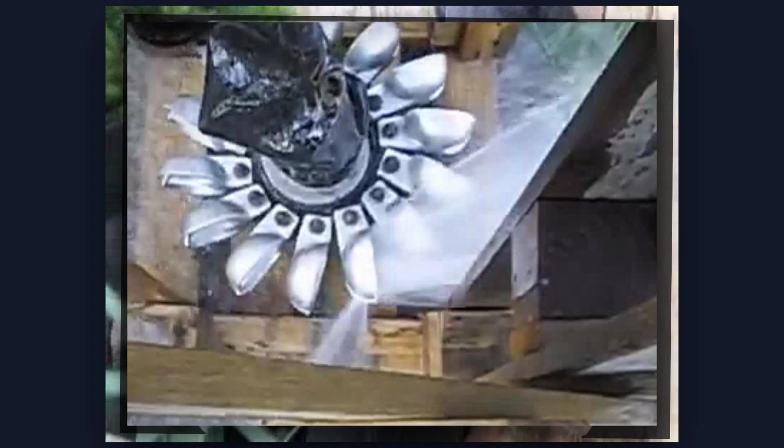The modern consumer is permanently tethered to a vulnerable, expensive utility grid, paying hundreds of dollars every month for basic survival. Meanwhile, traditional off-grid communities have quietly utilized localized aquatic physics for centuries to generate massive amounts of continuous mechanical and electrical power for free. No dams, no solar panels, no monthly bill.

This practice is called aquatic harvesting, and the physics behind it are so simple, the real question becomes why almost nobody is doing it. Every month, the average American household faces a rising power bill, now averaging over $150, with some regions seeing annual increases that far outpace inflation.

Over the last decade, residential electricity prices in the United States jumped from 13.4 cents to 15.3 cents per kilowatt hour, a 14% increase, while the cost of living crept up at less than half that rate. The numbers are blunt: utility rates climb, but reliability falls. In 2024, the average home endured 106 minutes without power, up from 92 minutes just 10 years before.

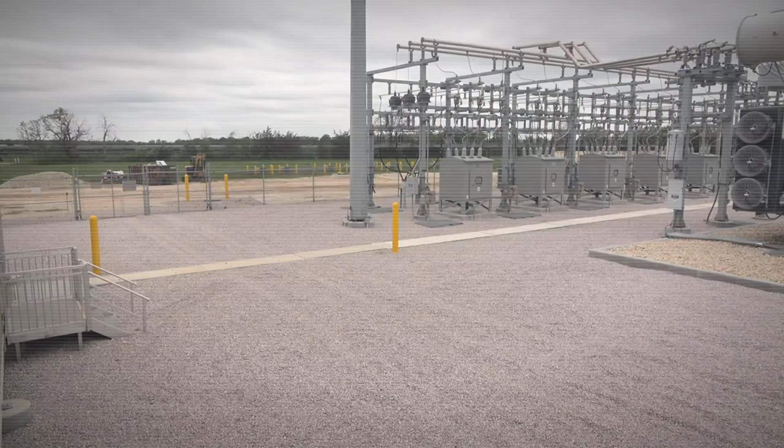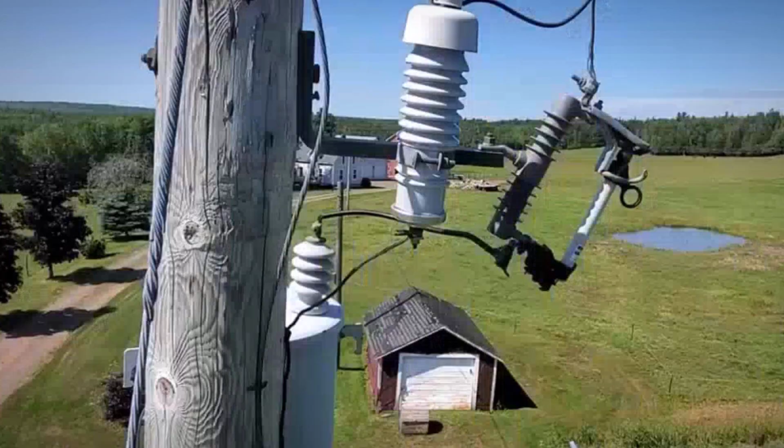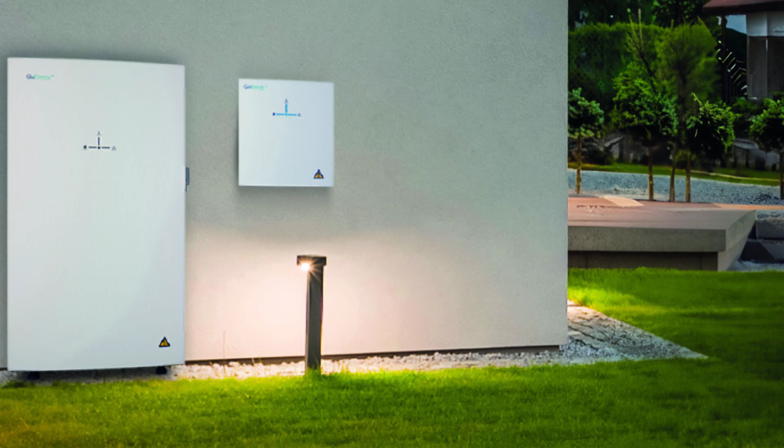Grid failures are no longer isolated to hurricanes or wildfires. Routine outages stretch across suburbs and small towns alike, driven by aging transmission lines, deferred maintenance, and overloaded transformers. Solar panels, once the favored escape from utility dependence, offer only a partial reprieve. Cloud cover, short winter days, and the ever-present risk of inverter or battery failure mean most solar homes remain tethered to the grid or invest thousands in lithium storage.

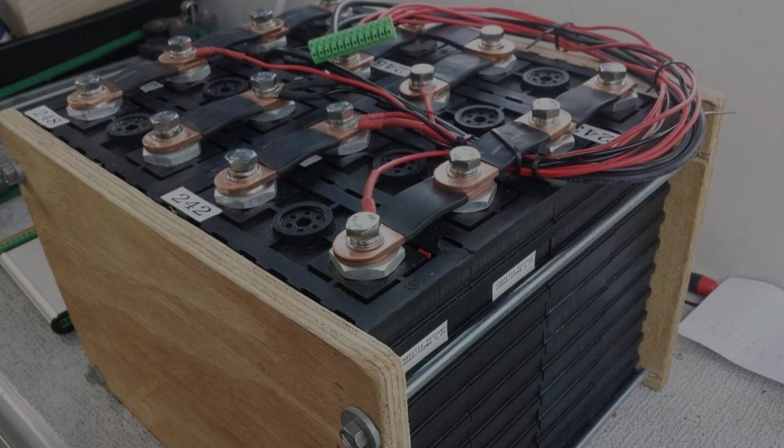A typical off-grid solar setup, sized to cover a family's nightly load, demands a battery bank costing $1,500 to $3,000 upfront plus replacement every 8 to 12 years. The promise of energy independence evaporates under the weight of replacement cycles, warranty claims, and the reality that even the best solar system sits idle half the day.

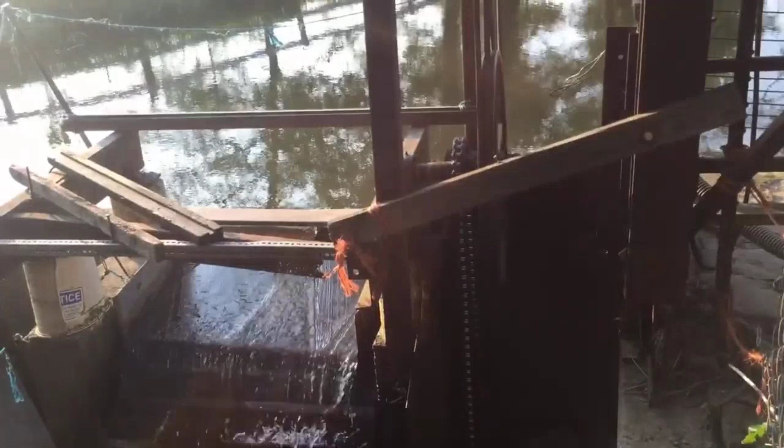Meanwhile, outage frequency and duration continue their upward climb, as documented by the IEEE reliability indices. The illusion of a dependable, affordable grid is unraveling. For those unwilling to accept rolling blackouts, ballooning bills, and the hidden costs of solar, the search for a continuous, self-sustaining power source is no longer theoretical. It is a matter of survival and economic sense.

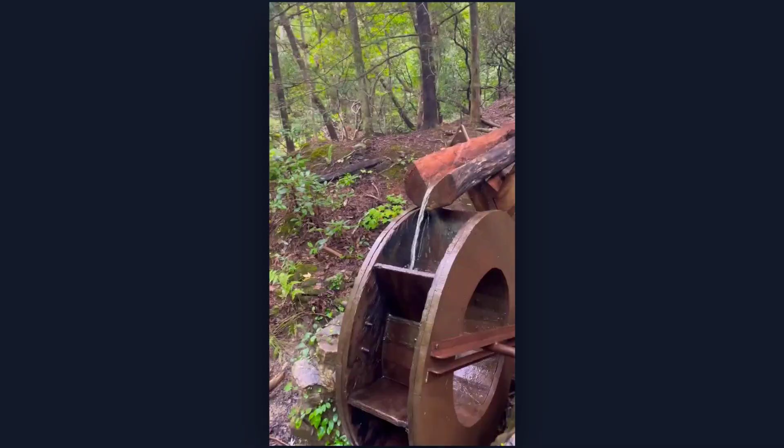Hydroelectricity in the public imagination is synonymous with concrete walls, flooded valleys, and turbines the size of trucks. The reality is far simpler and far smaller. For centuries, rural communities powered entire economies with nothing but a modest stream and a wooden wheel. 19th century grist mills scattered across North America and Europe ran day and night on vertical drops of just a few feet. No dam, no reservoir, no government contract, just moving water and gravity doing the work.

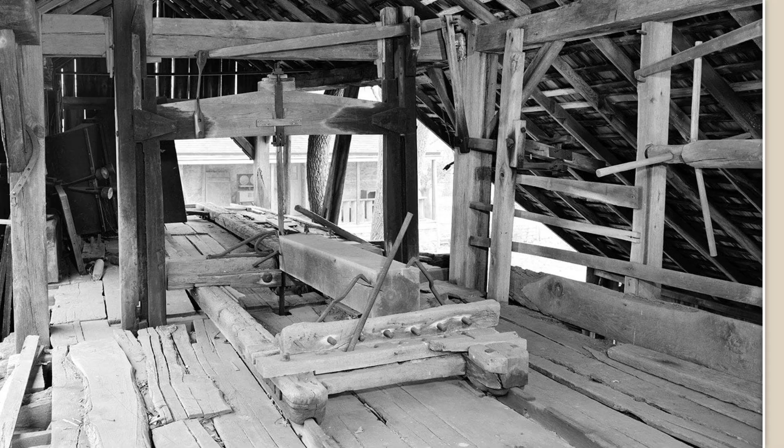These mills operated reliably through drought and storm, grinding grain, sawing timber, and pumping water with nothing more than a steady flow in a well-placed channel. The misconception that hydroelectricity demands a massive river or a dam the size of a city block is a modern invention shaped by the marketing of industrial utilities. In practice, the physics of water power scale down without losing effectiveness.

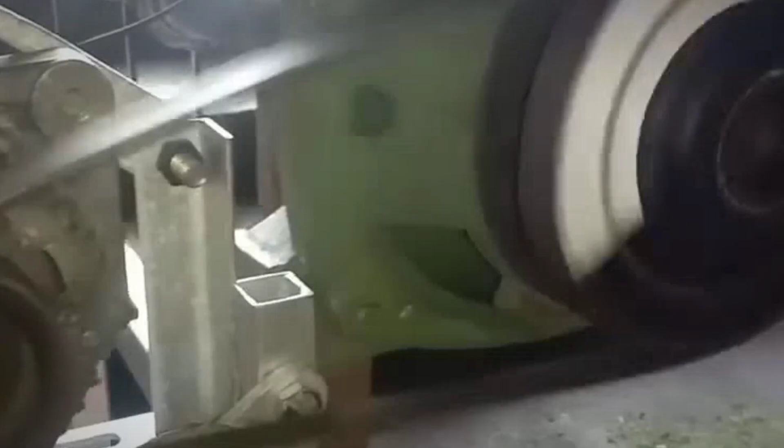A net head of 2 to 5 meters, less than the height of a single-story house, can drive a small turbine or turn a belt with enough force to supply all the lighting, refrigeration, and basic appliances for a rural home. The millwrights of the past understood this intuitively. It is not the volume of water that matters most, but the speed and vertical drop. Even a shallow creek, if channeled correctly, delivers continuous, predictable energy.

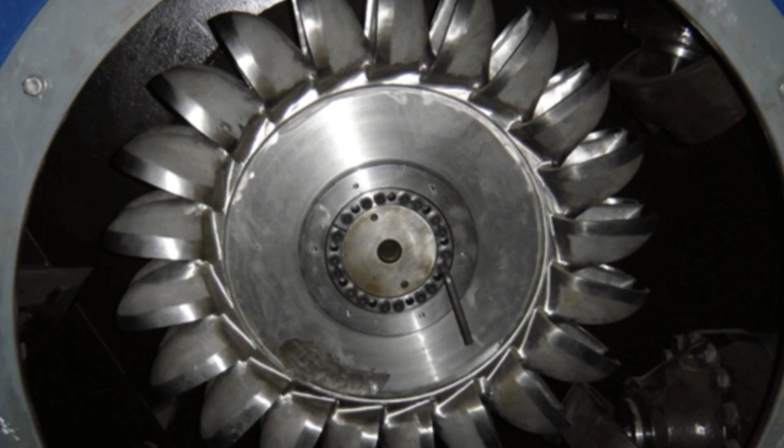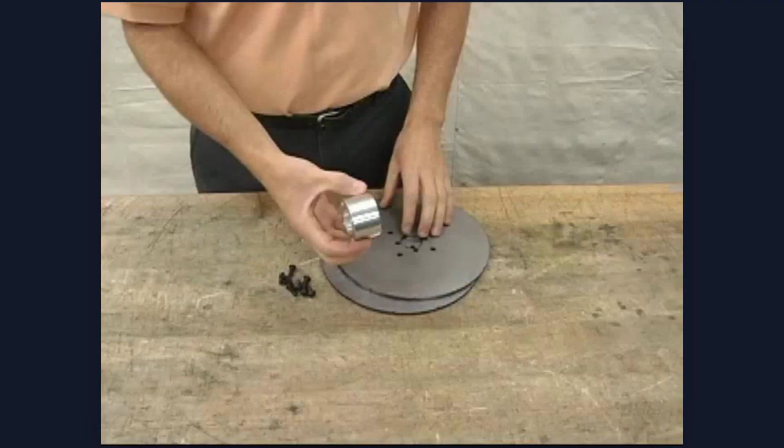Today's micro-hydro systems borrow directly from this legacy. Instead of wooden wheels, they use Pelton runners or Turgo turbines built to spin at hundreds of revolutions per minute on modest flows. Permanent magnet alternators convert that rotational force into electricity with no need for batteries or fossil fuels. The entire system can be assembled for less than the cost of a single month of grid power in some regions. The myth of the mega dam is a barrier, and it collapses under the weight of historical precedent and the undeniable power of moving water.

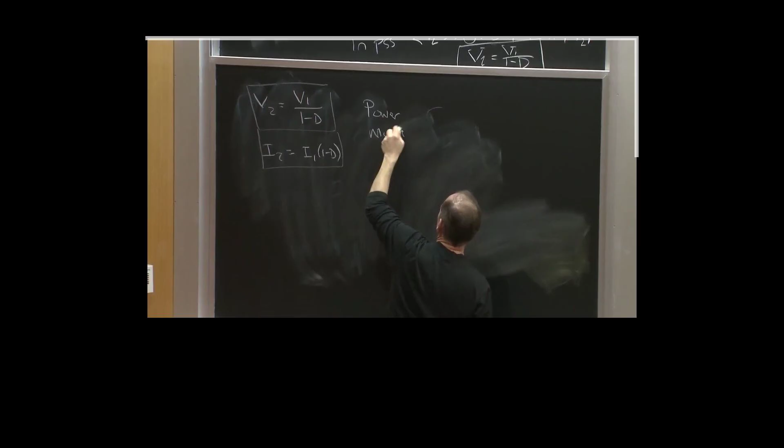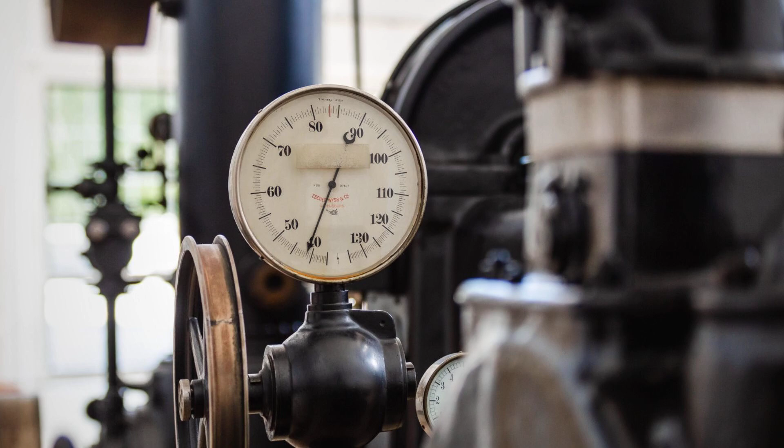Water falling under gravity carries an enormous potential. The core equation, P = ρgQH × η, translates this raw physics into real-world power output. Here, P is power in watts, ρ (rho) is the density of water, g is gravitational acceleration, Q is volumetric flow in cubic meters per second, H is net head in meters, and η (eta) is the total system efficiency, typically between 55 and 70% for modern micro-hydro.

Net head is not just the vertical drop from intake to turbine, it is the gross elevation minus all friction and turbulence losses in the pipe and nozzle.

Every meter of head counts. Consider a 100-foot vertical drop, 30.48 meters, delivering a modest flow of 1 liter per second. The theoretical output is 1,000 times 9.8, times 0.001, times 30.48, or roughly 299 watts. At 60% efficiency, that is 180 watts of continuous real electricity, enough to run lighting, refrigeration, and basic electronics

around the clock. Push the flow to 11.2 liters per second, and the same drop yields 3,350 theoretical watts. With typical losses, the net output lands near 2 kilowatts, rivaling the daytime surge of a full solar rooftop, but available 24 hours a day. The relationship is linear: double the head, double the power. Halve the flow, halve the output.

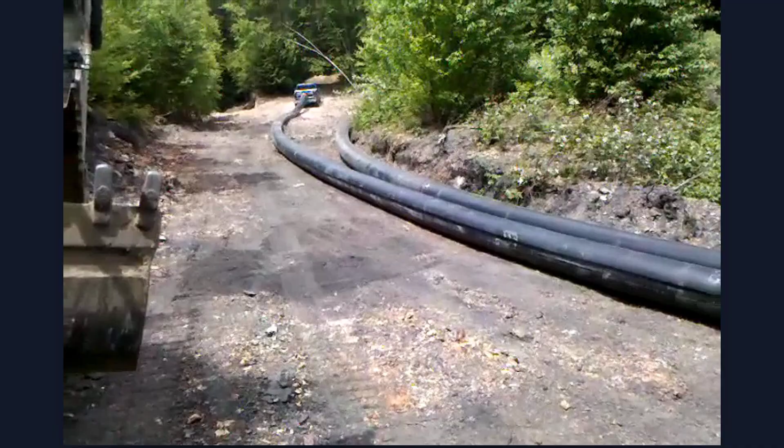This is why even a shallow creek, if it can be routed down a steep hillside, becomes a reliable source of energy. The design process begins and ends with these numbers: hardware sizing, pipe diameter, turbine selection, all follow from the available head and flow. A properly calculated net head is the master variable, dictating every downstream engineering choice. The theory is not abstract, it is the foundation for every successful microhydro system.

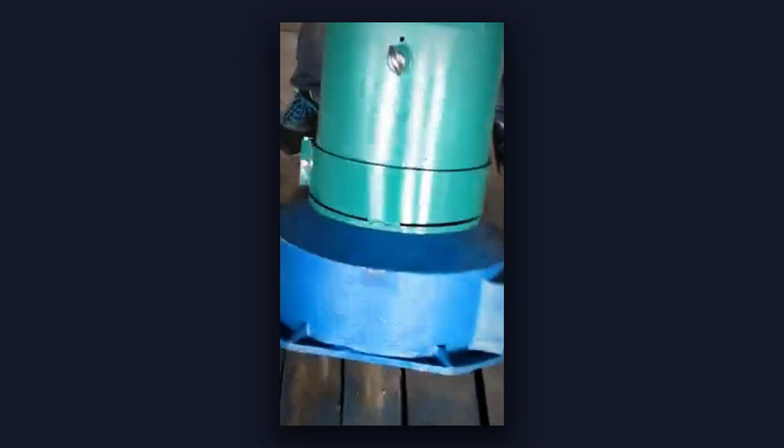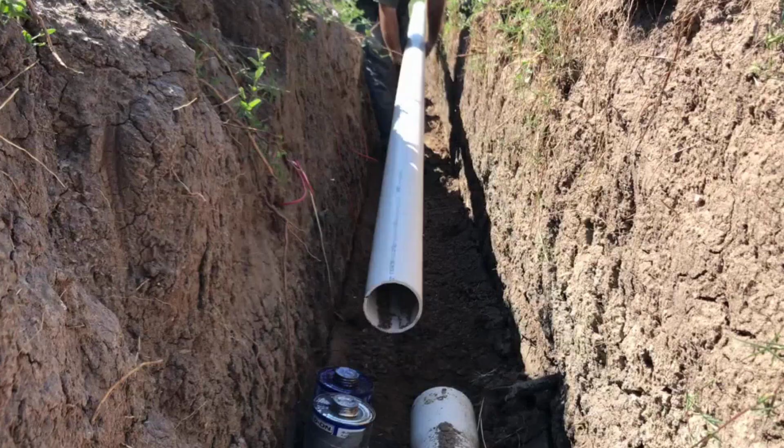From Amish workshops to modern off-grid homesteads, a 1 kilowatt microhydro system begins with the penstock, a length of pressure-rated PVC pipe, typically 4 inches in diameter, running from the intake to the turbine. For a 30-meter run at 0.1 cubic meters per second, Schedule 40 PVC holds a pressure rating well above the 4-bar maximum encountered even at 40 meters of head. Cost for this section, including solvent welded joints and intake screen, averages $120.

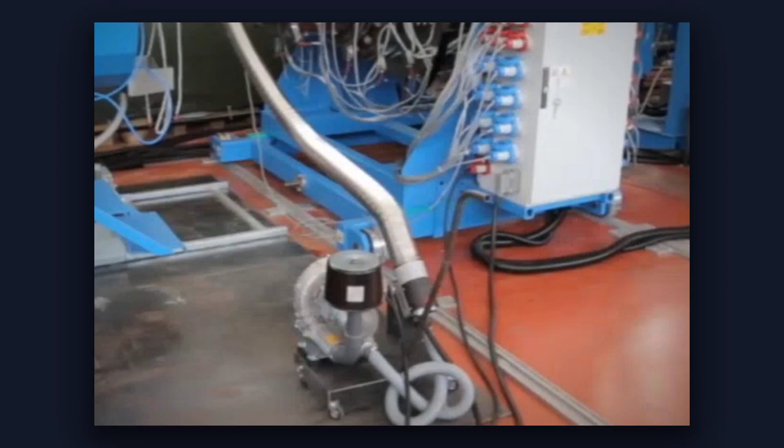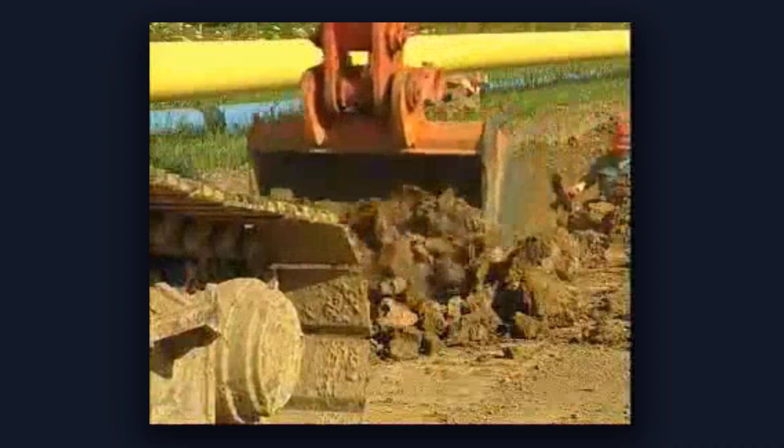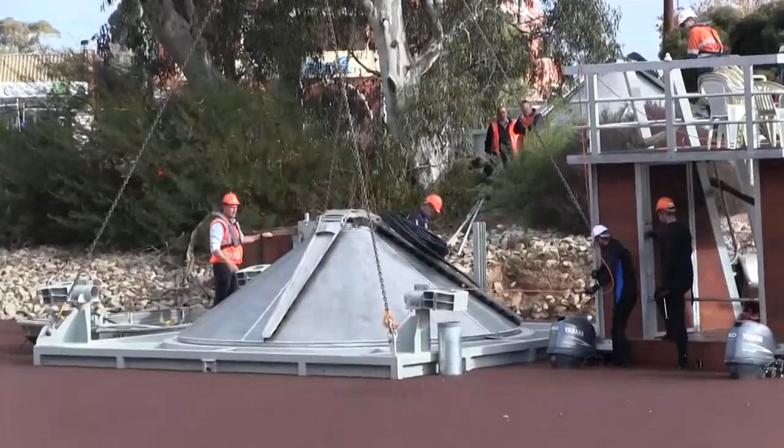PVC is preferred for its low friction coefficient and resistance to corrosion, and steel is reserved for high pressure or buried installations where pipe friction and UV degradation become secondary to mechanical strength. The intake must filter debris without choking flow. A fish-friendly mesh, 6 millimeters or finer, bolts across a concrete-filled intake box.

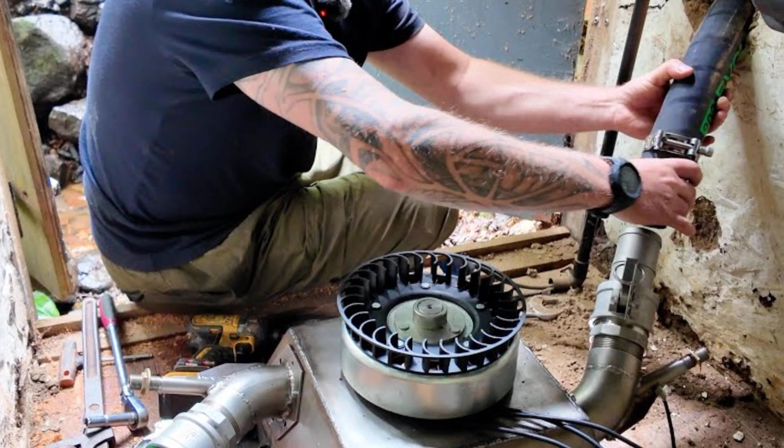Stainless steel nozzles with adjustable throats cost $80 each and focus the water jet, maximizing impulse on the turbine buckets. The nozzle diameter is calculated to match available flow and head, ensuring the jet velocity approaches 20 meters per second at 15 meters of drop. This kinetic energy is delivered directly to the Pelton runner.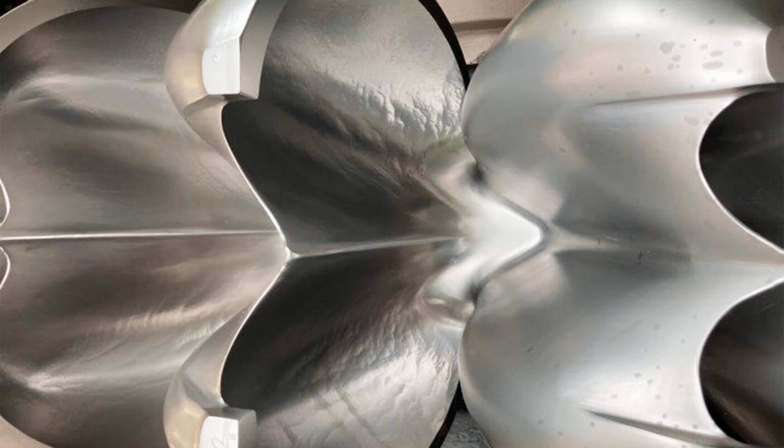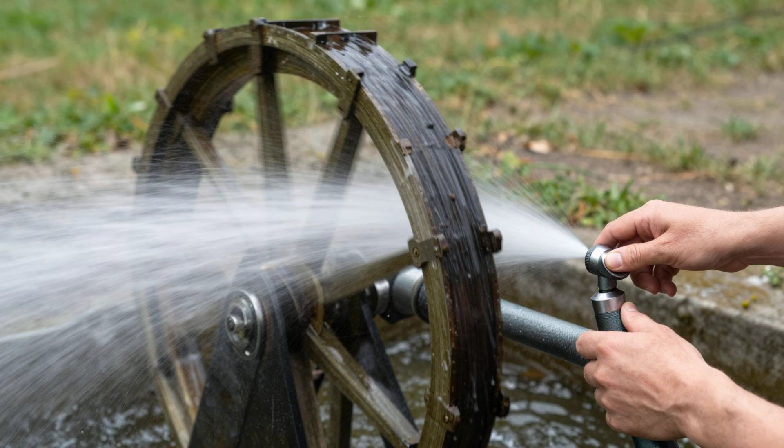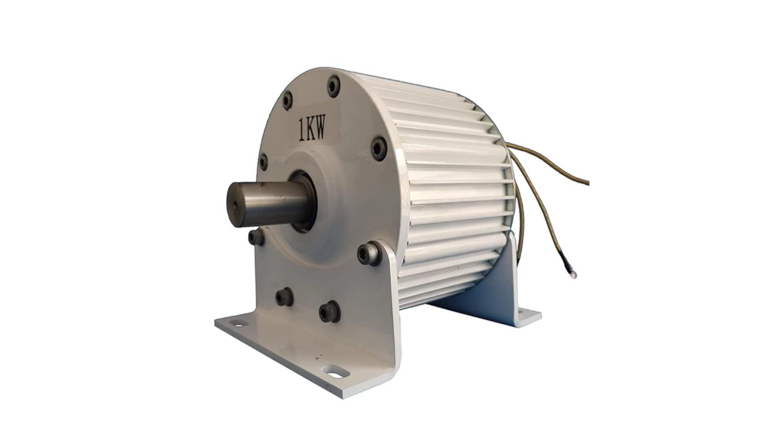The Pelton wheel itself, a 400 millimeter cast aluminum or composite runner, $250 retail, part number PEL 401K, features precisely shaped buckets to split and reverse the water jet. Under a 15-meter head and 0.12 cubic meters per second, the runner spins at 550 revolutions per minute, producing 260 Newton meters of torque. For lower head sites, a Turgo runner offers higher revolutions per minute at reduced torque with a modest efficiency penalty, but direct drive compatibility for smaller alternators.

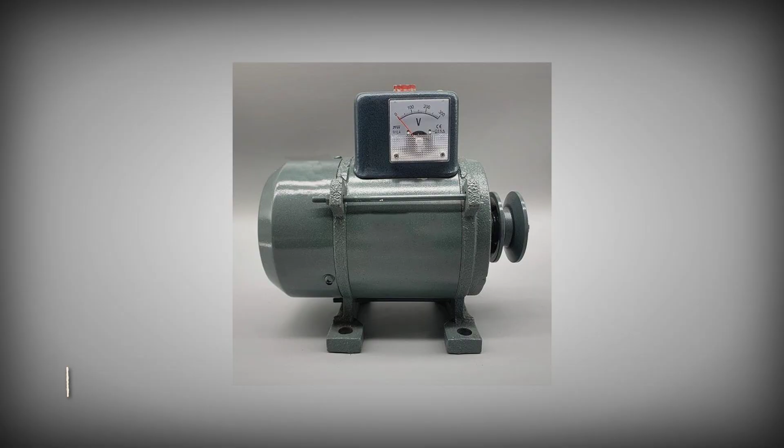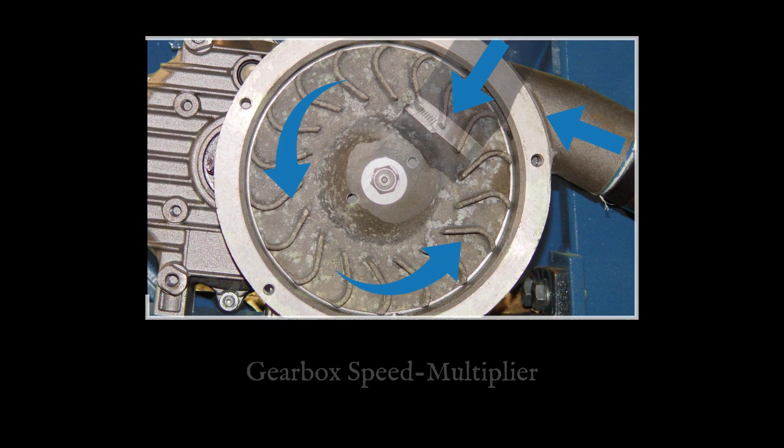Mechanical power transfers from the runner via a keyed shaft to a permanent magnet alternator. The MGL 3500, a 3 kilowatt 48 volt direct current unit, is the workhorse of off-grid hydro. Retailing at $300, it operates at 92% efficiency at rated speed, dropping to 85% under partial load. Direct drive is possible for high-speed turbines, otherwise a single-stage helical gearbox, $150, steps up runner revolutions per minute to match the generator's optimal range with less than 3% loss.

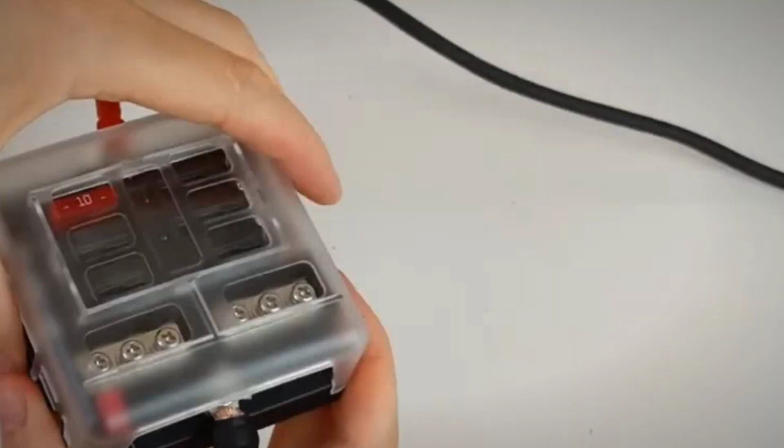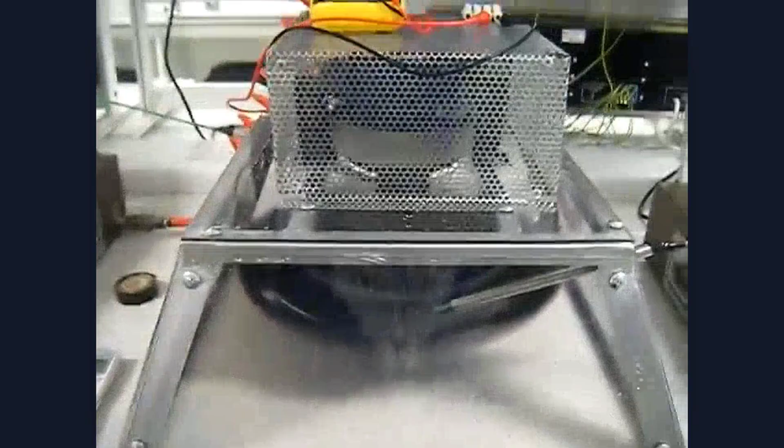Power exits the alternator as three-phase alternating current or rectified direct current, depending on load requirements. For battery-based setups, an MPPT charge controller, such as the TriStar TS45, $100, stabilizes voltage and maximizes output. Wiring, fuses, and mounting hardware add another $80 to $120, bringing the total bill of materials for a 1 kilowatt system to just under $1,000. Lower cost builds substitute a Turgo runner and smaller alternator, dropping the price to $620 at the expense of a 5% efficiency loss.

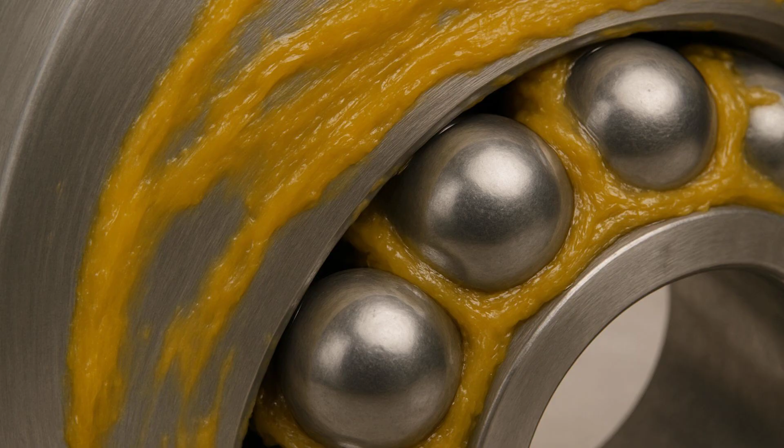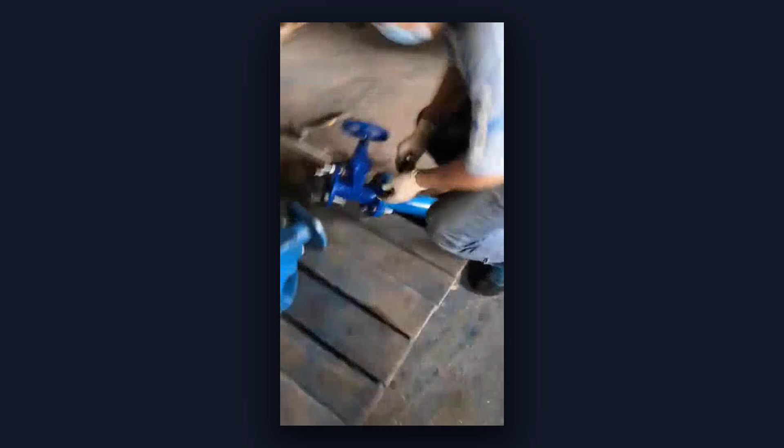Every component, from PVC penstock to Pelton wheel, is off-the-shelf, open source, or easily fabricated by a local machinist. Receipts and parts lists from actual builds document the true cost, $500 to $1,000 for continuous 24-hour power, assembled in a weekend with basic tools and no specialized labor. This is not theoretical engineering, it is a blueprint for energy independence, grounded in physics and delivered by water moving under gravity.

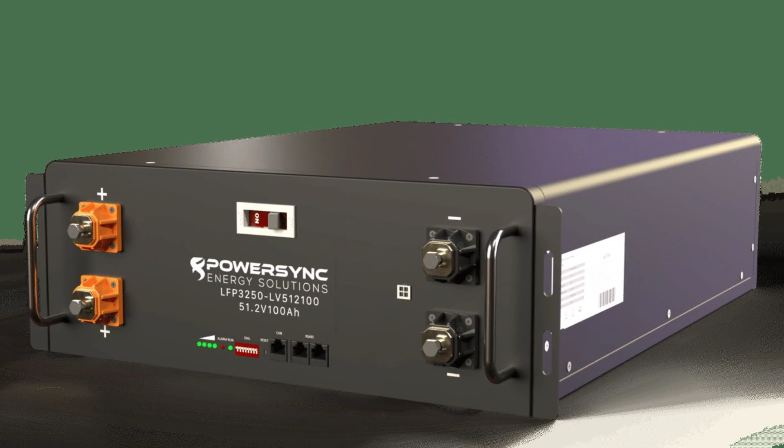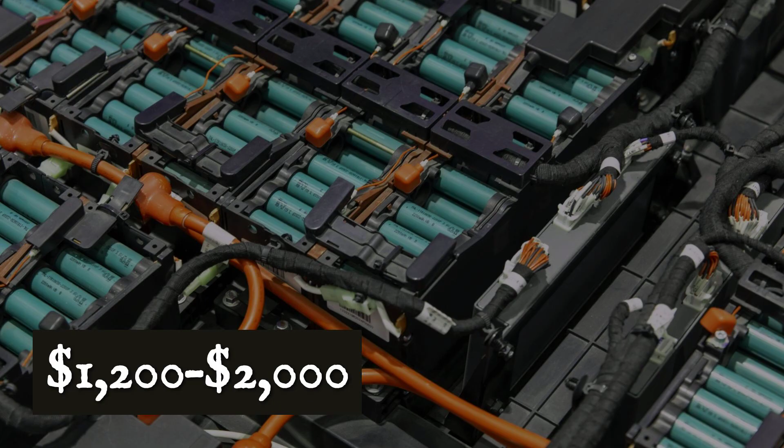A lithium battery bank sized for true off-grid living is not a luxury, it is a necessity forced by the intermittent nature of solar. Industry-standard lithium iron phosphate modules, including the battery management system and enclosure, cost between $120 and $200 per kilowatt hour. For a typical 10 kilowatt hour battery pack, the upfront price lands between $1,200 and $2,000. Stretch that to 20 kilowatt hours, and the outlay doubles.

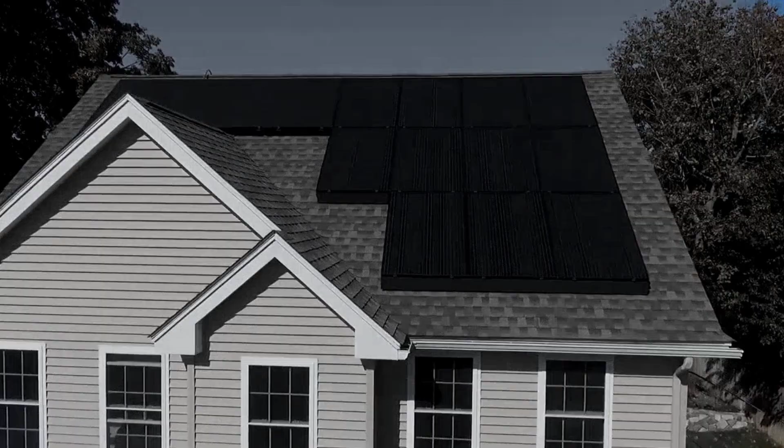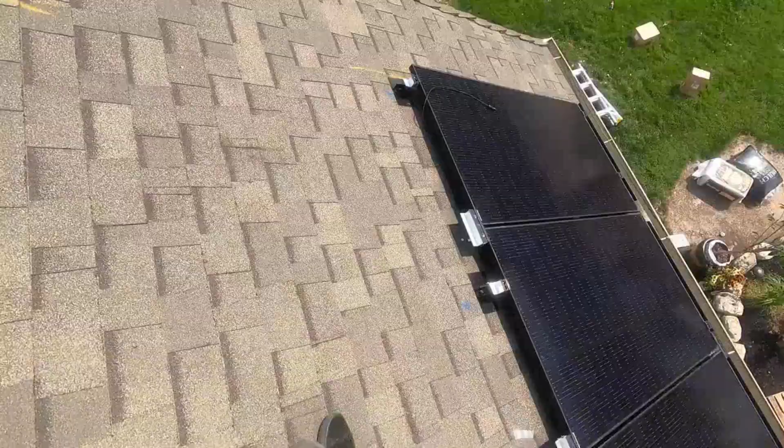This is before the cost of the solar array, the inverter, the charge controller, or the wiring hardware that pushes a fully independent solar setup well past $5,000, even with careful sourcing and do-it-yourself installation. The true cost is not just in the purchase. The median warranty is 8 to 12 years, and field data from homesteader forums confirm that most banks are swapped by year 10. Over a 20-year window, the battery line item alone can reach $3,000 to $6,000, not counting disposal fees or the environmental cost of spent cells.

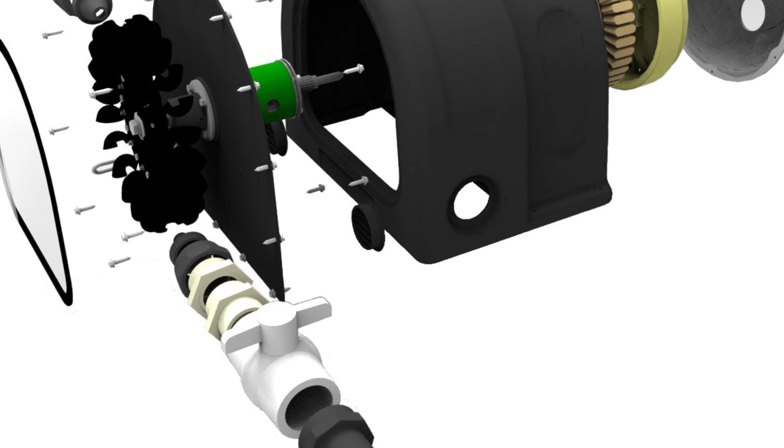Microhydro upends this math. A properly built system drawing from a modest stream with a vertical drop of 3 to 5 meters delivers power every minute of every day. No battery bank, no charge controller, no inverter cycling, and no depth of discharge worries. The alternator spins, the lights stay on, and the refrigerator hums through the night. For $500 to $1,000 in materials, including a PVC penstock, a Pelton runner, a permanent magnet alternator, and basic mounting hardware, an entire household can be powered with no storage at all.

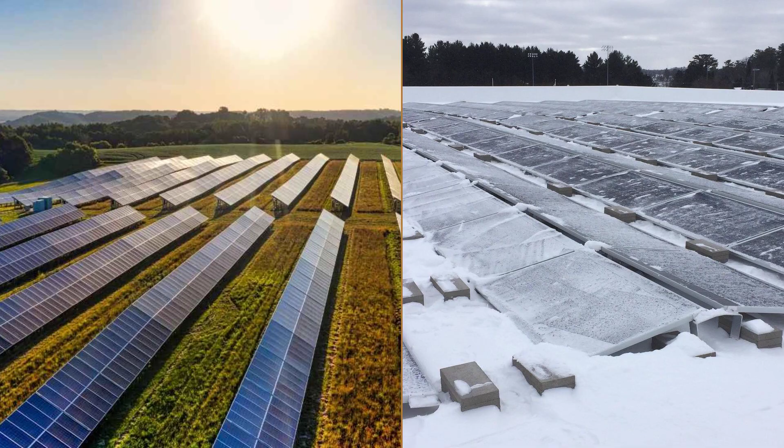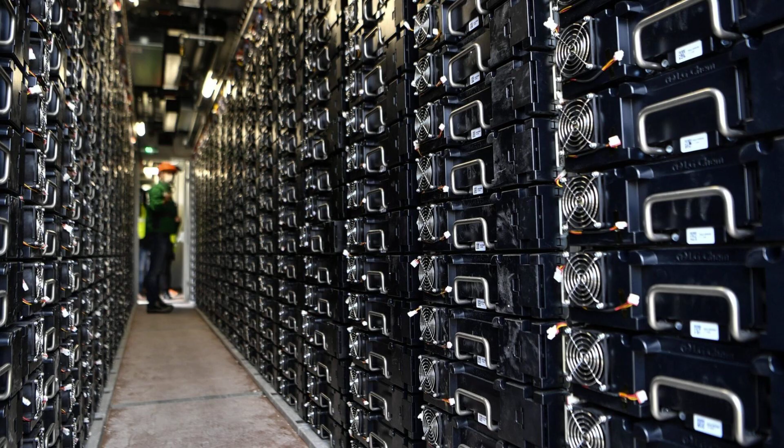The continuous output is the difference. When water flows, watts flow. There is no need to overbuild for cloudy days or undersize for winter. The system's output is as steady at 2 a.m. as it is at noon. Levelized cost calculations drive the point home. The U.S. Department of Energy's own figures put the lifetime delivered cost of lithium storage at 12 cents to 20 cents per kilowatt hour. Microhydro, once installed, delivers at zero marginal cost.

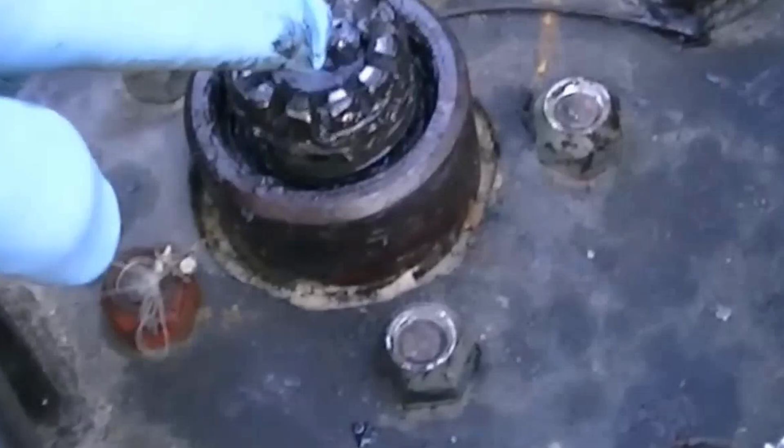Over a decade, a $1,000 microhydro turbine running at 500 watts produces more than 43,000 kilowatt hours, enough to power a home for years, at a hardware cost of less than 2 cents per kilowatt hour. The only recurring expense is routine maintenance, a tube of grease for the bearings, a replacement nozzle or two, and the occasional flush of the intake screen. Real-world field logs from off-grid sites in Oregon and British Columbia show annual uptime exceeding 95%, with outages measured in hours per year, not days.

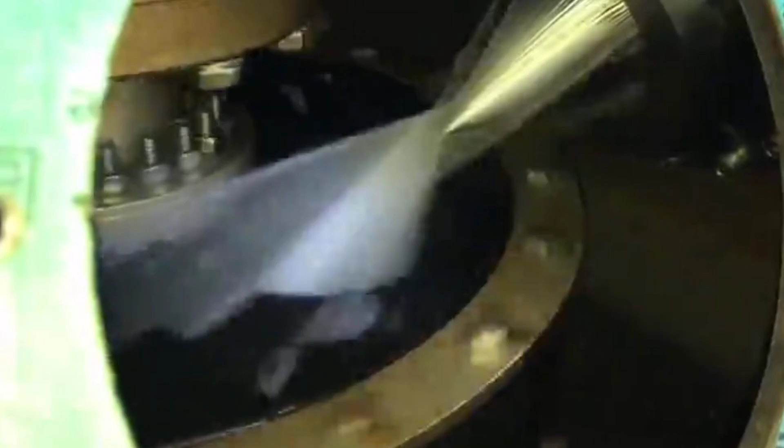The economics are not theoretical. One homesteader in the Cascades running a 1.2 kilowatt Turgo turbine on a 12-meter head reports continuous output every day but the driest weeks of late summer, and his total build cost was $950, assembled with off-the-shelf parts and no specialized labor. The system has run for 5 years with only a single alternator bearing replacement.

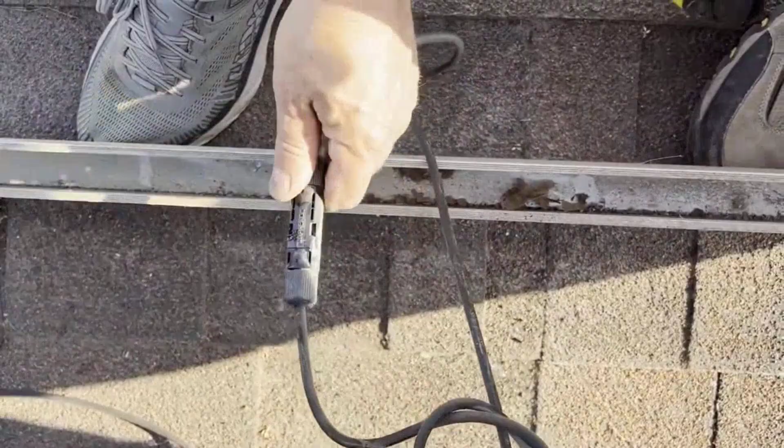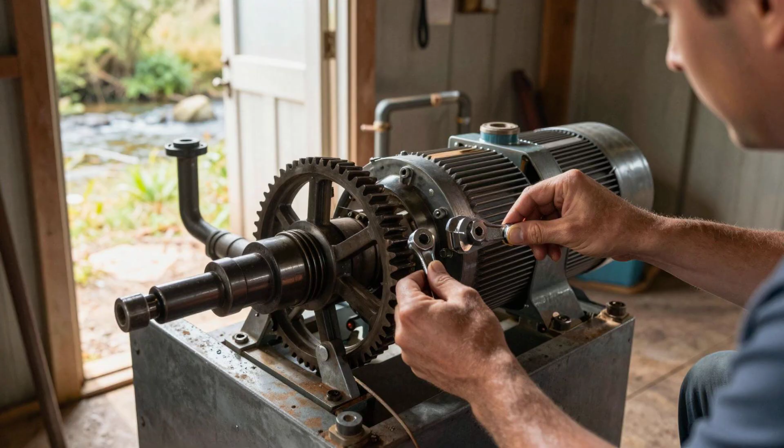By contrast, his neighbor's solar array required a $2,400 battery swap after 9 years, plus a $600 inverter replacement after a lightning strike. The microhydro system never missed a night, never needed a generator, and never left its owner in the dark. This is the quiet revolution. A modest stream, a calculated drop, and a handful of mechanical components yield uninterrupted, decentralized power. The battery bank becomes obsolete, and the grid's rolling blackouts and the solar system's 2 a.m. silence are replaced by the constant presence of moving water and spinning metal. The numbers are blunt, the physics unyielding, and the outcome is clear. In the economics of independence, continuous power wins.

A hydraulic ram pump operates without fuel, wiring, or external power, and its only inputs are a modest vertical drop, typically 6 to 8 feet of head, and a steady flow of water. In Amish communities across Lancaster County and Holmes County, these pumps are buried assets, delivering water uphill for livestock, dairy barns, and household cisterns. The design is brutally simple: 2 moving parts, a waste valve and a delivery valve, hammer open and shut using the inertia of falling water to generate a pressure spike.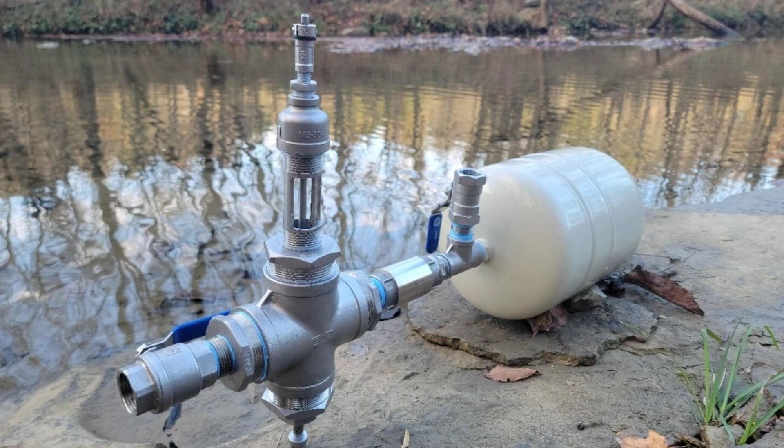Efficiency hovers between 25 and 35%, but the trade-off is relentless reliability. Amish operators resurface valve seats with brass or steel, keep drive pipes at optimal length, and rely on communal maintenance. Ram pumps are often installed and serviced by family-run metal shops or local technicians listed in county extension bulletins.

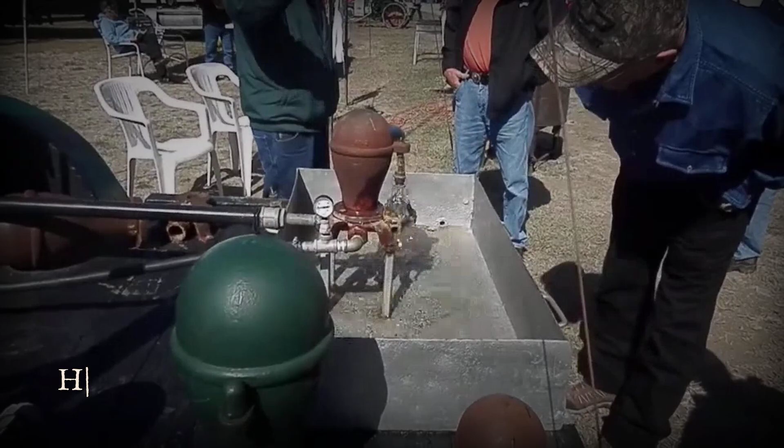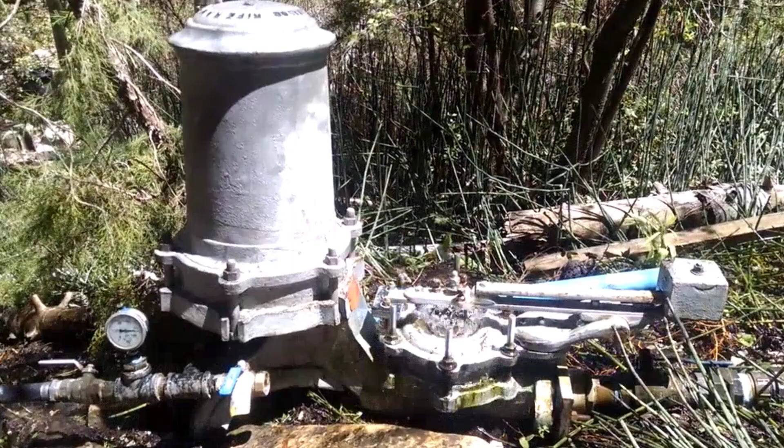A historian specializing in rural technology notes that the hydraulic ram is not just a tool, but a cultural anchor. It embodies the Amish ethic of self-sufficiency, robust, repairable, and utterly indifferent to blackouts or fuel shortages. Unlike solar panels or battery banks, the ram pump's only maintenance is the occasional valve replacement or pipe flush. Its continuous operation is enforced not by software, but by physics and gravity, a mechanical promise kept for generations.

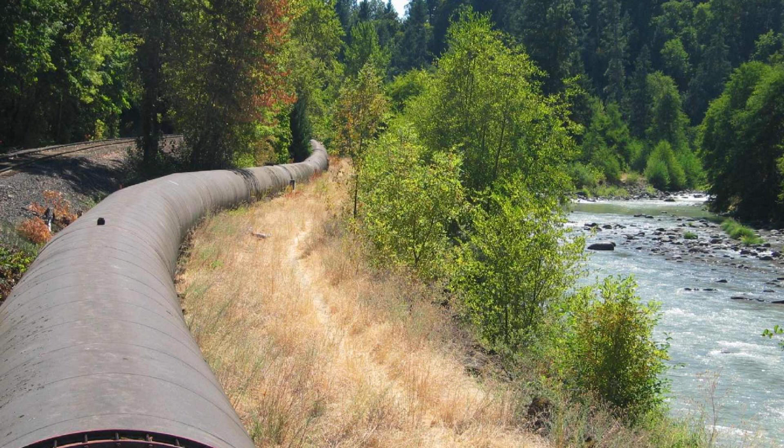Permit applications for micro-hydro installations routinely trigger a gauntlet of regulatory scrutiny, regardless of scale. In county planning departments from Oregon to Pennsylvania, even a 2-inch PVC penstock designed to divert less than 0.2 cubic feet per second can be flagged as a potential threat to watershed integrity. Official denial letters cite cumulative impact as the operative phrase, invoking the risk that many minor diversions might, in aggregate, alter stream flow or degrade aquatic habitat.

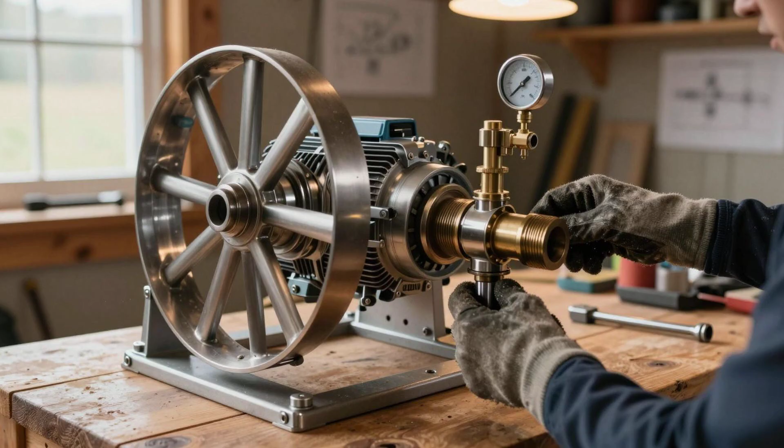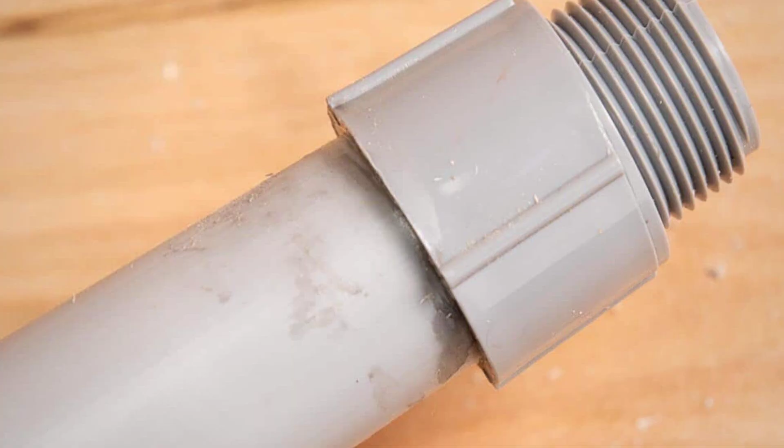In March 2023, Douglas County, Oregon, rejected a 4-inch penstock for a 300-watt Pelton turbine, stating the project would exceed the cumulative impact threshold for the lower river watershed and could impair fish passage. A similar refusal in Greene County, Pennsylvania, referenced a 2-inch PVC pipe and concluded the alteration constitutes a material change in flow regime. The cumulative impact on the watershed's hydrology cannot be determined at this time.

Environmental regulators defend these decisions by pointing to state water rights statutes and the National Environmental Policy Act, which mandate that any stream alteration, even one supplying a single off-grid home, undergo environmental review. The language is deliberately broad, granting planning commissions wide latitude to block projects that fall outside established utility channels. One county planner, interviewed on record, explained, "We are not just evaluating a single pipe. We are projecting the effect if every property owner on the creek did the same. The law requires us to consider the watershed as a whole."

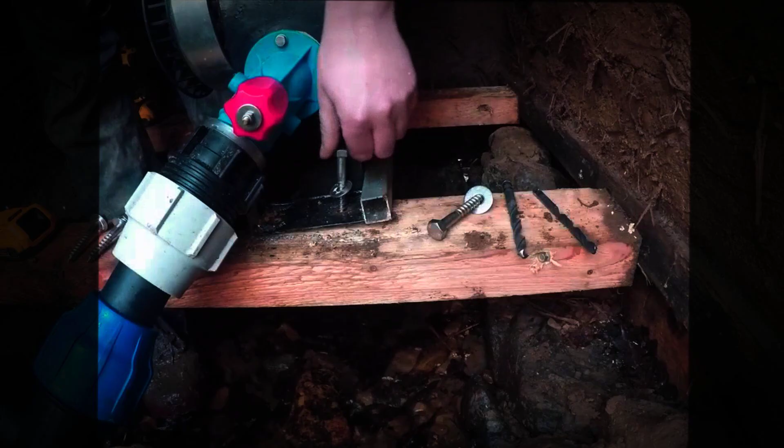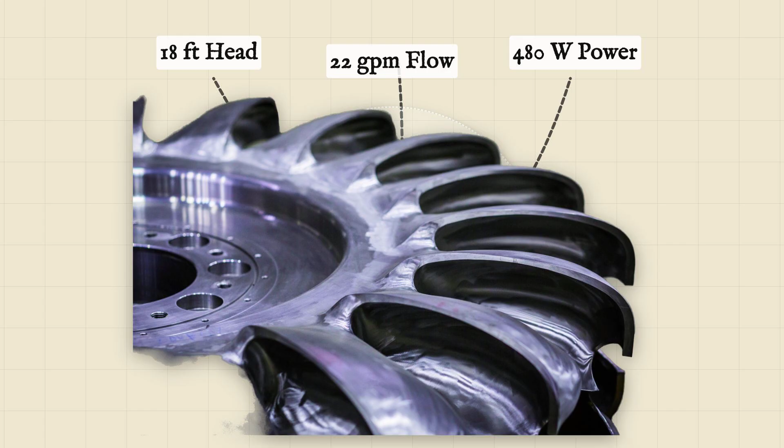For homesteaders and underground organizers, these denials are more than bureaucratic hurdles. They are existential threats to decentralized power. The technical reality is stark. A 2-inch penstock costing less than $80 in materials can deliver enough head pressure and flow to generate continuous wattage for an entire household. Yet the regulatory apparatus treats it as a potential hazard, not an engineering solution. The result is a standoff, private innovation forced to operate in the shadows, while official policy clings to the logic of centralized control.

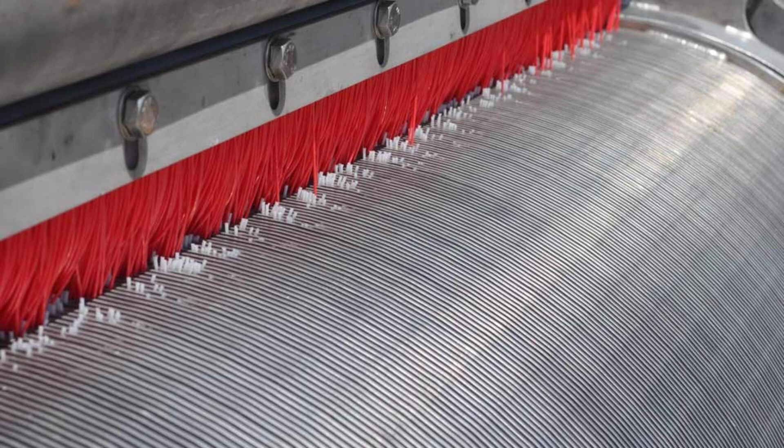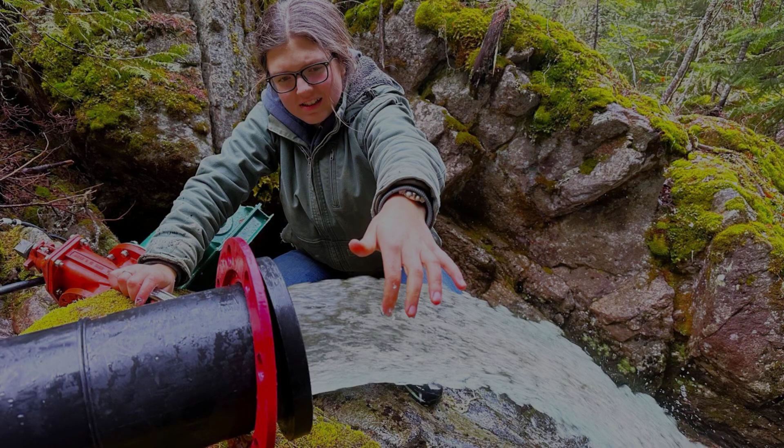Every off-grid organizer knows the checklist by heart. Divert a fraction of a stream, never enough to dry a creek bed, always less than 10% of low season flow. Use a fish-friendly intake screen, 6 millimeters or finer, to let fry and debris pass. Route water through pressure rated PVC no wider than 4 inches, and return it downstream within 100 yards. The impact is surgical. The stream's chemistry and temperature remain unchanged.

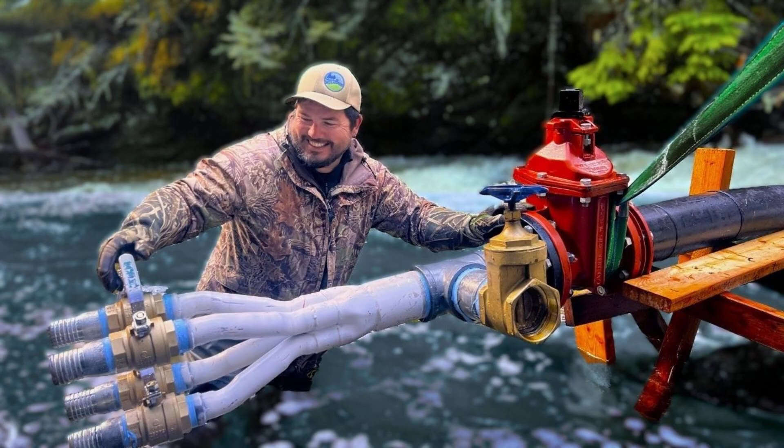The aquatic habitat undisturbed. A single 2-inch penstock delivers enough head and flow to power a household, yet vanishes in the grass when the job is done. No concrete, no reservoir, no scars on the land. The entire system is assembled with hand tools, often by a family or a small crew. Maintenance is a quarterly filter cleaning and a shot of grease for the alternator bearings. If the system needs to be removed, it leaves behind only the original stones and soil. This is the low-impact ethic, mechanical self-sufficiency without ecological footprint.

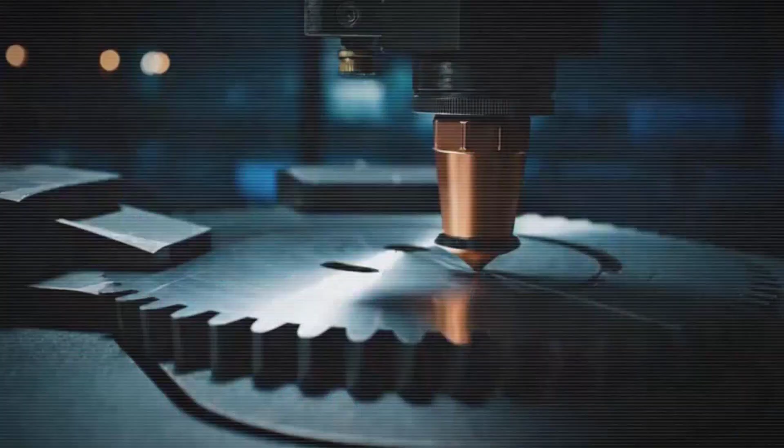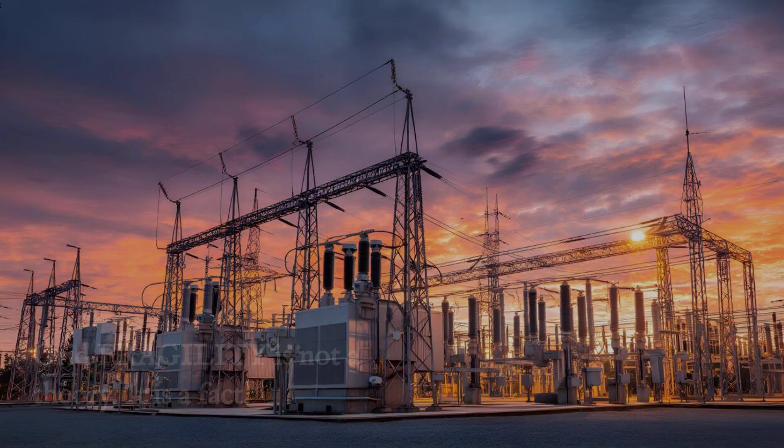For those ready to act, the tactical steps are clear. Survey for vertical drop, measure minimum flow at the driest season, source off-the-shelf Pelton or Turgo hardware, and keep every diversion temporary and reversible. The blueprint is open source, the math is public, and the path to independence starts with a tape measure and a willingness to ignore the myth that power must come from above. The grid's fragility is not your burden. The creek is waiting.

Grid fragility is not a theory, it is a fact. Right now, a $1,500 micro hydro build using 2-inch PVC and a Pelton wheel can deliver power 24/7, while most solar rigs stall at dusk. The only real barrier is regulatory interference, not physics. In a world addicted to intermittent, overpriced power, continuous flow remains the ultimate act of engineering defiance. What system would you trust when the lights go out?